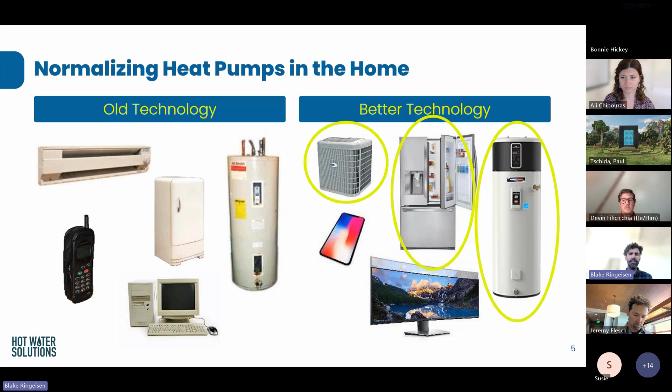An air conditioning unit is essentially a heat pump that's locked to only operate in one direction. A refrigerator, that's a heat pump. It's taking the heat that's inside the refrigerator and through the refrigeration cycle, moving it outside. And then a heat pump water heater, same thing. It's taking heat from the space around the tank itself and putting it into the water.

Not to get too bogged down with complicated things, but I at least wanted to show you what is the refrigeration cycle. This is how a heat pump works. So it's comprised of a couple of technologies here: evaporator, compressor, condenser, and expansion valve. And well, how does it work? So it utilizes the changing phases of a refrigerant under pressure.

Refrigerants are designed to become a gas at specific temperatures, so it's more efficient to unload heat into a specific source. So like I said, it's taking the heat from the outside of the tank in the room where it is, and it's through this refrigeration cycle moving that heat into the water.

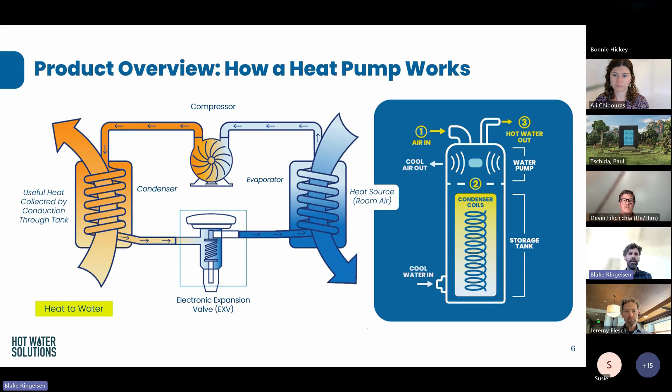So why is it better to heat water with a heat pump compared to an electric resistance tank? First, let's look at the energy usage in a typical home. So everyone knows their HVAC system uses a lot of energy. That's the biggest source here. Typically it's about 46%. And it's pretty obvious when you have a really cold month because you see it in your bill, right? Your HVAC system, your heating system was working hard.

So you see that. But the water heating is not quite as obvious. It's spread more evenly throughout the year. Your heating costs are spread more evenly throughout the year for heating that water. So you might not be aware that it is such a big energy consumption device. It's typically the second biggest one in the house. That's why it's important.

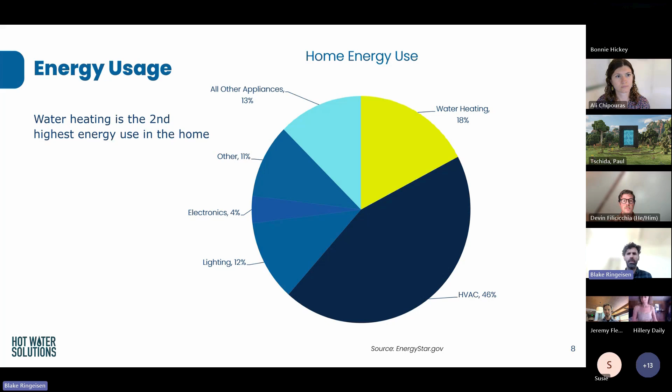One of the measures that we use to measure the efficiency of a heat pump water heater is called the COP, the coefficient of performance. This is a really simple metric. It's basically the energy output, which is the hot water, divided by the energy input. That's the electricity. Just for reference, a typical COP of an electric resistance hot water heater is about 1. So every 1 unit of energy that you put into the system, you get roughly 1 unit out.

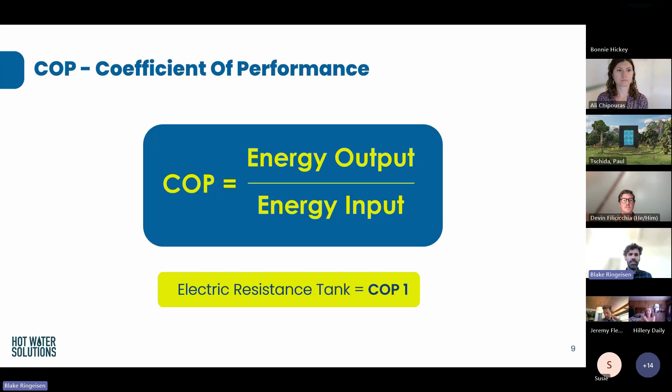This is the same efficiency as your toaster oven. It's the same as your electric baseboard heaters. It's the same as your hair dryer. It's a very old and simple technology. And then how does that compare to a typical heat pump water heater? Well, like I said, with electric resistance, 1 unit of energy, that's on the left here, 1 unit of energy in equals 1 unit of energy out.

But a heat pump water heater, much, much better. For every 1 unit of energy you put into the system, you typically get about 3.5 units of output. So the heat pump water heater COP is typically around 3 or 4, depending on the conditions. So you immediately can see a really big savings in your bill if you're switching from an electric resistance to a heat pump water heater.

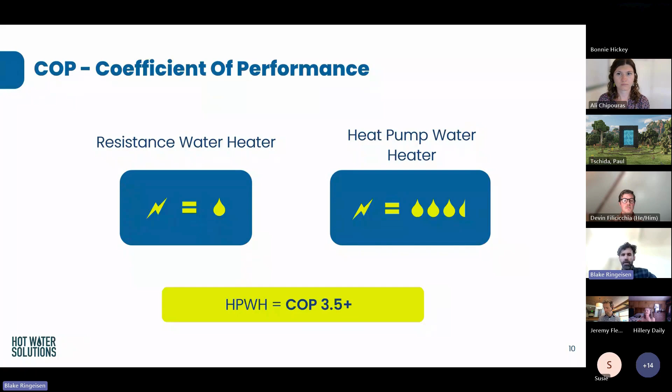And you can see it right here on these stickers. So on the left, that's a typical electric resistance water heater. So it's over $500 of energy per year. And on the right, that's a heat pump water heater. So you see it's a fraction of it, just over $100 for a typical user.

I don't want to go too much into other metrics, but just wanted to mention this so you're aware of it. The U.S. Department of Energy's latest metric for communicating the energy efficiency of residential water heaters is called the UEF, Uniform Energy Factor, and that's been in place for a few years now. So that can give you a good apples to apples comparison when comparing the efficiency of various water heaters.

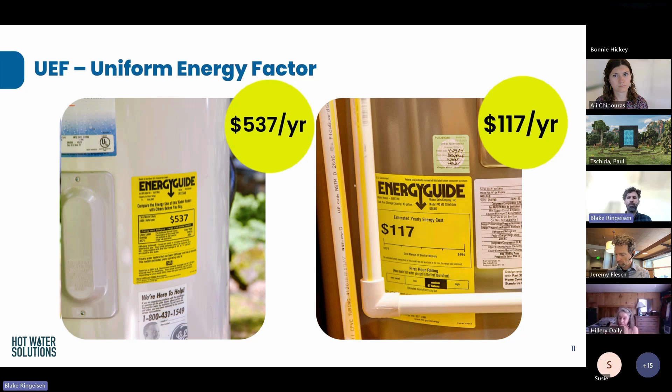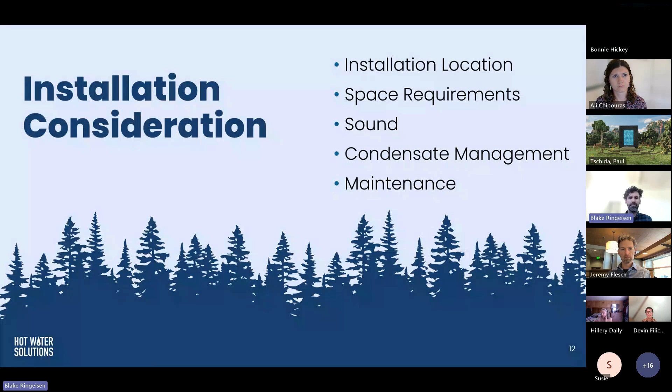So first of all, where do you put the tank? It depends on your climate. So here's a picture of the Northwest states and also Wyoming. The more moderate climate zone of Western Washington and Oregon, it's climate zone 4C here on the chart. You have more flexibility where you can put the unit because it's warmer outside. But as you come into colder climates like Montana, you can see it's in climate zone 6. You have to be a little careful of where you put your unit.

So if you're in Montana like I am, you can see in the matrix here, a basement, that's a good location for it, as is an interior room. But you probably wouldn't want to put it in a garage or an uninsulated room because it's too cold in those areas. And if you put a heat pump water heater in sufficiently cold temperatures, its efficiency starts to go down. And you can even have cases where the electric resistance backup kicks on, and then that defeats the purpose of having it.

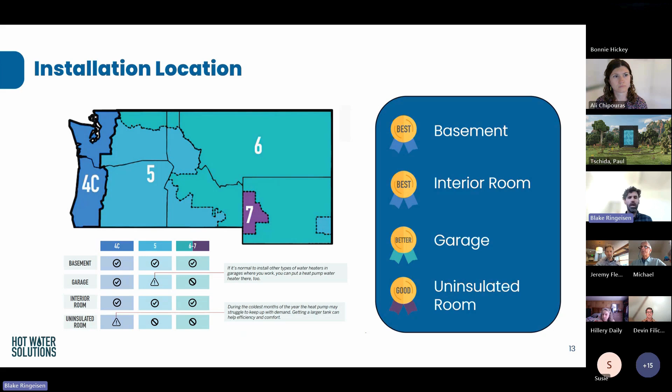So you definitely want to make sure you put it in the right place, and it's recommended in our climate zone here in Montana to place it in either a basement or within the conditioned shell of the house itself, somewhere in an interior room or utility closet.

So sizing for these units. They typically come in 50, 65, and 80 gallon tanks. NEEA, we typically recommend to size up one tank size from what you had previously if you're coming from electric resistance. The reason for this is if you're able to rely on the heat pump itself rather than that electric resistance backup, it takes a little bit longer sometimes to charge or to heat the water. So giving yourself a little extra buffer is a good idea.

And you can see the size of the families for each of these tank sizes here. In my own case, it's me and my wife. We've got 2 kids. And we also have an apartment, an ADU, with an adult living in it. So we've got 3 adults and 2 children in our household. We have an 80-gallon tank, and it serves us very well. Previously, when I lived in Seattle, it was just my wife and I. We had a 50-gallon heat pump water heater tank, and that was great for us there. So yeah, when you think about this, if you have sufficient space, we recommend sizing up just one size.

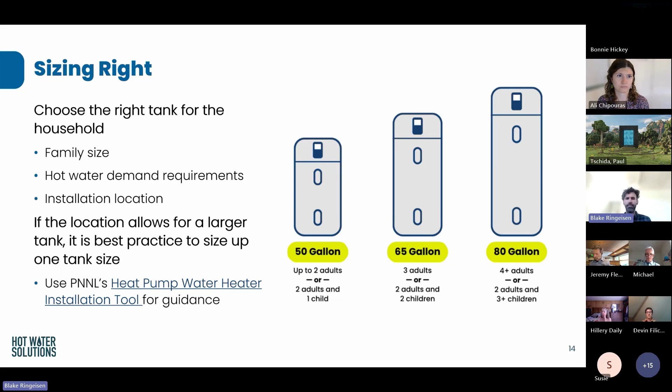The next consideration here is the space requirements. You've probably heard that heat pump water heaters put out some cooler air. So if you put this in a really small closet that's closed off, it can start to cool off that room too much so that you're going to be hurting the efficiency of the unit and starting to rely more on the electric resistance. So you'll find that most manufacturers recommend a certain minimum cubic footage of space. Typically it's around 8 feet tall, 8 feet wide, and 8 feet long. Roughly 450 or 500 cubic feet from what NEEA has seen in some of our testing.

You're definitely going to affect the system performance if you go much smaller than that, although there are a number of interventions that you can take if you do have only a small room available. For example, in my house here, it's in a pretty small utility closet. So instead of installing a solid door, I've installed a louvered door, so it's able to pull air from outside of that closet. So now it's a sufficiently large space and doesn't overly cool the space around the water heater.

So yes, the discharge air temperature is typically about 8 or 10 degrees colder than the air temperature around it, and it's also drier. So this is effectively a dehumidifier as well, which could be an additional benefit, maybe if you put it in your basement, for example.

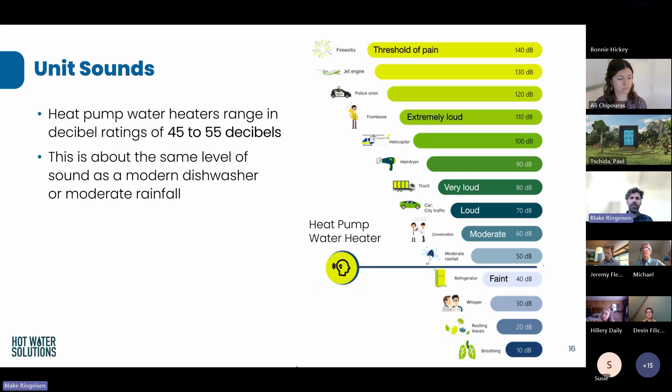One consideration that people sometimes don't think about is a refrigerator or a dishwasher. Those are around the same number of decibels as a heat pump water heater, but those are typically emitting the sounds lower and below or maybe behind cabinetry. The heat pump water heater is kind of at your ear level if you're standing, so it may seem louder than that if you walk right up to it, but it's not terribly loud. It's approximately the same as a refrigerator for reference.

Let's see. Oops, I skipped a few slides here. Let's go.

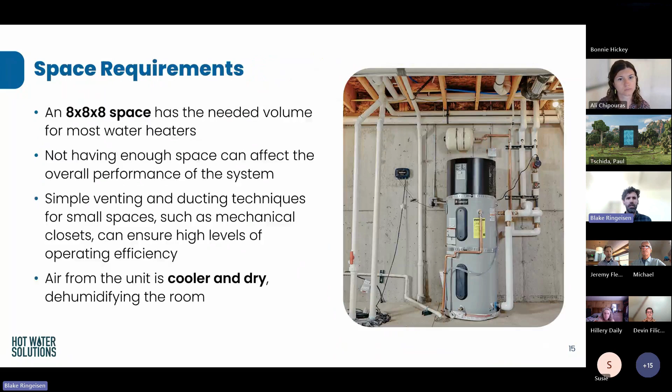There we go. So condensate. Like I said, this is essentially a dehumidifier. It does create some condensate, so that is a consideration. You'll want to take note of any available drains, condensate pumps or lines that you have in your house. Hopefully you have one close by and easily accessible. You'll have to run a condensate line to active plumbing. In my case, it goes straight to drain in my house. Or you may need to utilize a pump if you're going uphill or even through the outside of the building.

Water heaters can create about 2 gallons per day of condensate, although in our drier climate in Montana, I find it to be much, much less than that. In my case, I look at it each time I go by there. It's typically not more than a dribble. But one other consideration in our cold climate, if you are pumping or moving the condensate through the wall to the outside, you need to consider if this is going to be a freezing issue. In Oregon, for example, they're starting to require some heat tape if you're going out in this same application. So yeah, please take note of that.

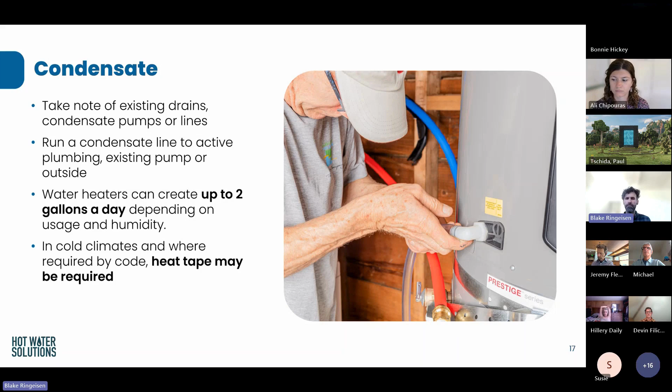Filters and maintenance - this is really simple, but you need to be aware of it. Most heat pump water heaters have a filter, like the one shown here, that needs to be cleaned every 1 to 3 months on average. It literally takes 15 seconds to slide it out, wash it off, dry it off, and put it right back in.

This is important because it protects some of the equipment inside the machine from getting dirty. You can also visually check that the condensate line isn't clogged - I've never had a problem with mine, not a single time. But the filter is the main thing that needs cleaning, and it's really simple.

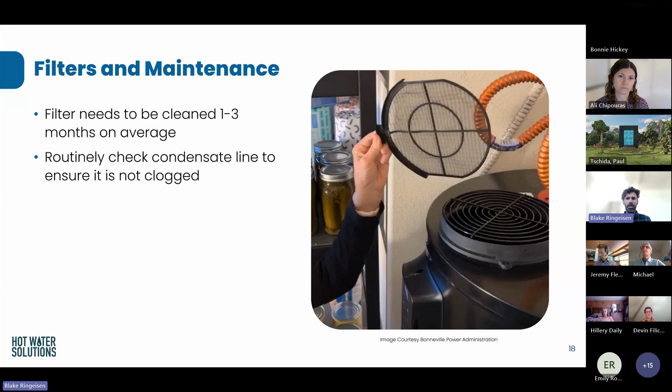All right, lastly, I wanted to give you a couple of resources available at Hot Water Solutions, which is one of NEEA's programs. You can check out our website, hotwatersolutionsnw.org. You'll find a bunch of videos, an overview of the technology, a database of installers, and technical articles if you want to read more about it. There's some good content there.

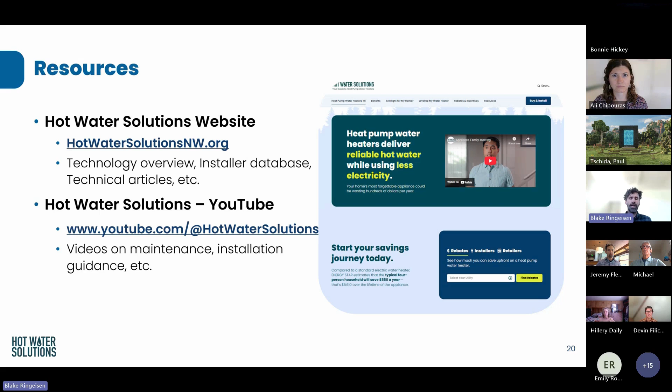We've also got a YouTube page at Hot Water Solutions where you can find more videos on maintenance, installation guidance, and things like that if you intend to do your own installation.

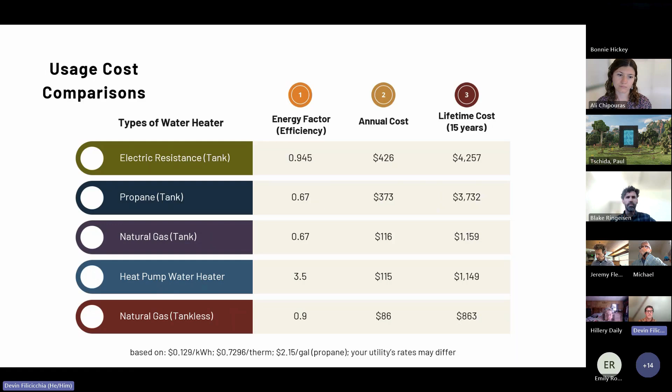Next, I'm going to talk a little bit about the rebates and incentives available. There are quite a few because this is such an efficient appliance and folks want to incentivize it. I'll talk about local rebates, utility rebates, tax credits, and some financing mechanisms that can help support purchasing.

Thinking about local rebates, not every locale will have rebates or incentives, but I'll say I think they're typically one of the more straightforward rebates available. So, the ones I'm familiar with in the state of Montana: the city of Bozeman offers a $500 rebate for anyone on Bozeman City Water to install a heat pump water heater, and you can receive an additional $75 for participating in a satisfaction survey as a follow-up.

Both the city of Missoula and Missoula County, so anyone within county limits, are offering a $1,435 rebate for heat pump water heater projects. So those rebates are pretty straightforward. We don't care what your old water heater was, and we don't care if it's a new build or a retrofit. The main stipulation is that it's a heat pump water heater and the location in which it's being installed.

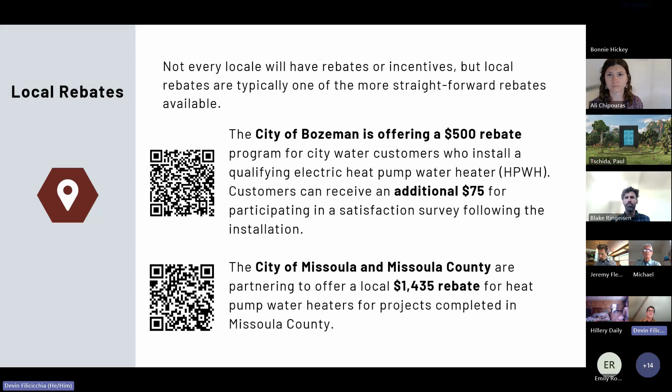Thinking about utility rebates, they vary widely from utility to utility. There's a lot of utilities in the state of Montana, so I didn't pull them all out, but I did pull out Northwestern's. It's important to keep in mind that the reason these utilities are incentivizing things like heat pump water heaters is typically to reduce their electrical load, so they don't have to buy or produce more electricity. Because of this, it's important to understand if they will supply a rebate for fuel switching, for example, if you're going from a gas water heater to an electric one.

Some rebates don't. For example, Northwestern Energy offers a $3,000 rebate for heat pump water heaters, but that's only if you're going from an old electric water heater to a heat pump water heater.

Thinking a bit more about switching from gas to electric, I think it's important to keep in mind some additional considerations. You may need to wire a 240-volt outlet, you may need additional panel capacity, and you may need to think about capping the gas lines. So other things to keep in mind there. And as I mentioned, be sure to check if you're fuel switching and if those rebates from the utility apply to you.

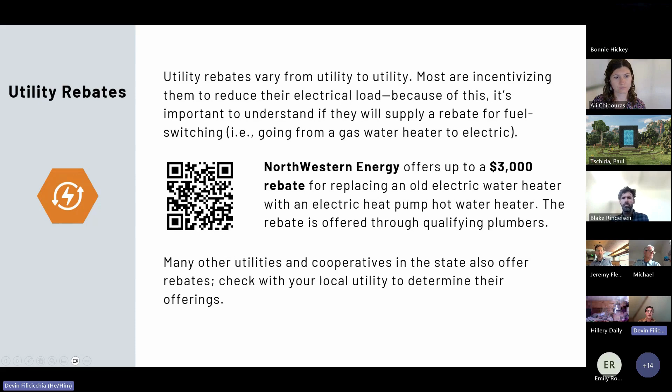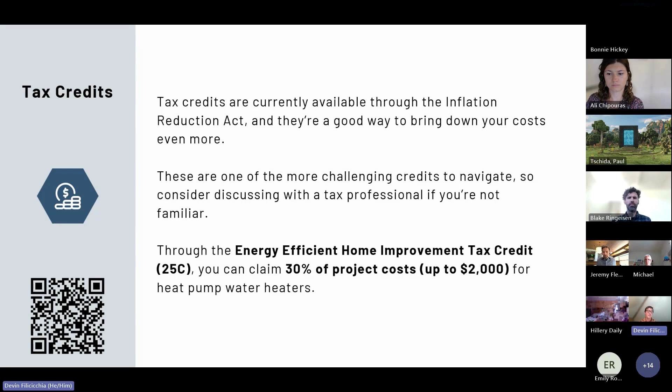Tax credits are another opportunity. They're currently available through the Inflation Reduction Act, and personally I think they're one of the more challenging credits to navigate. So just to note, I would consider discussing this with a tax professional if you're not very familiar with tax credits. But they're available through the Energy Efficient Home Improvement Tax Credit, also known as 25C. This means you can claim 30% of project costs up to $2,000 for heat pump water heaters, but you can also do it for other appliances as well.

There are also some financing mechanisms available. The two I'm most familiar with are Montana Department of Environmental Quality's Alternative Energy Revolving Loan Program, and Clearwater Credit Union, which offers some energy efficient and solar loans. But I will note this is just what I'm familiar with locally, so be sure to check with your local financing provider to see if they offer any as well.

Montana DEQ's program has a really low interest rate at 4% APR. I will mention though, it's pretty competitive and it fills up typically. Clearwater Credit Union has a couple of different loan programs to support things like heat pump water heaters, but their energy efficient loan comes in around 6.9 to 8.9% APR. They also offer a solar loan where you can bundle solar with other upgrades like a new water heater at 6.9 to 7.25% APR.

One note about financing: I think these are great mechanisms, but typically I hear of them being used when folks are doing a bit bigger of a project, so maybe replacing a few appliances or doing a retrofit on your home. It may not be the best option, and I'm not sure about the eligibility if you're just financing a new water heater.

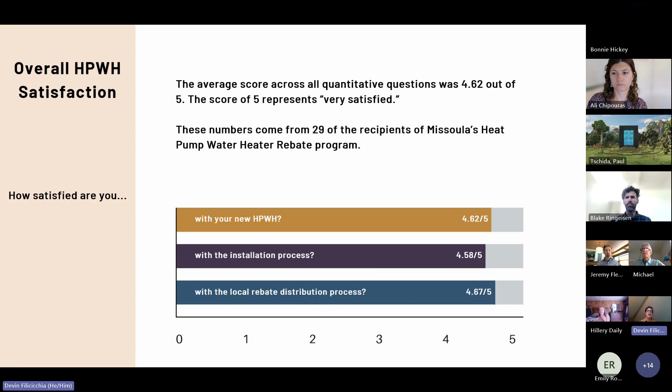In general, the average score across all of the quantitative questions was 4.62 out of 5, and 5 represents very satisfied. So most folks are satisfied with their new heat pump water heater. Most folks were satisfied with the installation process, and most folks were satisfied with the local rebate distribution process as well.

We also asked folks what they don't like about their heat pump water heater. 5 people just mentioned the amount of hot water it provides, or something to that effect. 4 people mentioned the noise of the appliance. Interestingly, 4 people said they thought the appliance was quiet, and 4 people also said that the appliance was noisy. So you can see there it really depends on the application, where it's at, things like that.

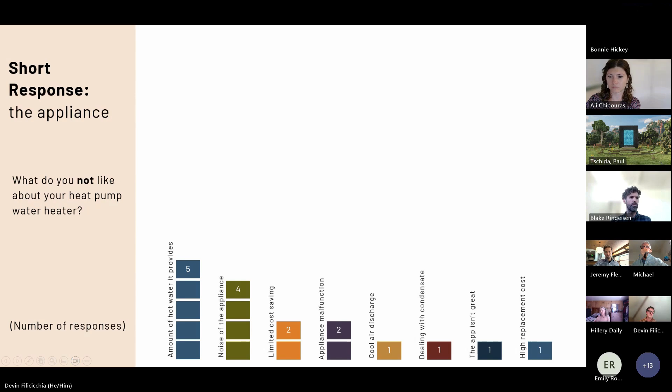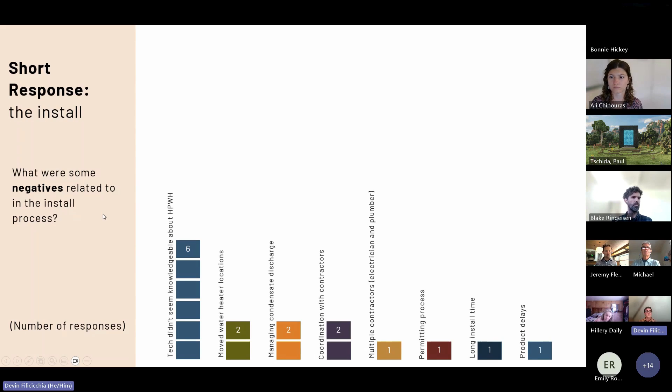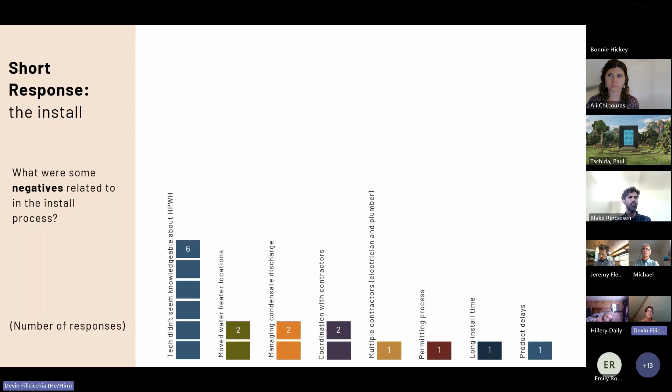Some of the negatives when asked about the install process: 6 folks mentioned that the technician didn't seem knowledgeable about heat pump water heaters. 2 people had to move their water heater locations. 2 people mentioned managing the condensate discharge. 2 folks mentioned just coordinating with contractors in general was a challenge. 1 person mentioned that they had to interact with multiple contractors, so an electrician and a plumber. The permitting process, long install time, and product delays were other things folks mentioned.

I think the takeaways here are that in general, folks were very excited about their new heat pump water heater. There were some aspects that posed challenges, but I think the coded responses help us better understand what those were, at least in these few examples. It's kind of interesting, and I like to see this, that most of the things that people didn't like related to the appliance could be addressed with additional considerations prior to the install.

So the main complaint we saw was folks not having enough hot water. And like Blake mentioned, this can easily be addressed through either a better understanding of the appliance modes or sizing up your water heater. And then the biggest challenge related to the installation process was that the installer didn't seem to be very knowledgeable about heat pump water heaters.

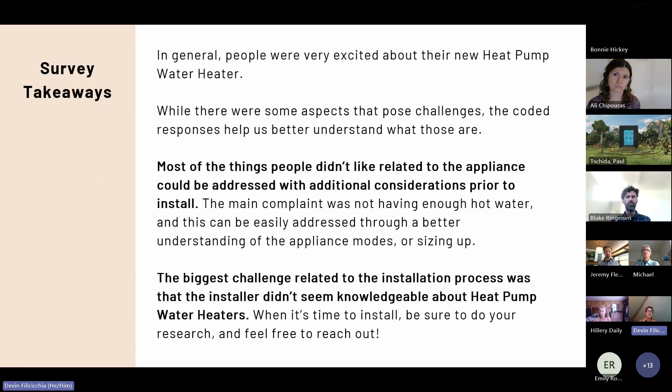But thinking about knowledgeable contractors, I can pass it over to Devin with Garden City Plumbing and Heating. And Devin, if you want to just share a little bit about your experience with these heat pump water heaters and kind of what your perception is as an installer.

So yeah, what I was sharing is that I'm a big proponent of heat pump water heaters. I have one in my own home, and we also have one here in our office building. And so in the right application, I think they can be a perfect technology. But I do want to acknowledge they're not for everyone, and they aren't a fit in every situation. When it comes to heating and air conditioning solutions, as well as hot water solutions, there's no silver bullet.

But this does fit a tremendous number of applications. So when we look at it, one thing I do love about heat pump water heaters is that, from an installation standpoint, they're not dramatically different from a traditional electric tank. The uptake of information for a contractor to be able to install a new system is pretty quick.

It's a fast learning curve, and even though some have said their plumber isn't particularly familiar with this technology, a well-experienced quality contractor can really get up to speed fast. If they aren't experienced with it, some pretty quick, simple training can get them to a point where they're knowledgeable enough to be helpful to most people.